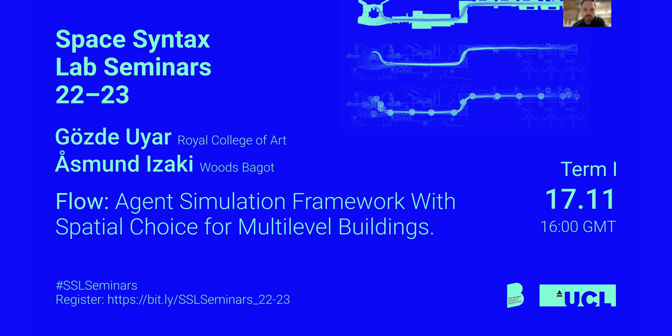Yes, so we decided to go with my part first because it sort of sets the stage, introduces the overall framework. So that's the direction, the order that we went with. We both worked on both papers, so it's a really fluid collaboration, I could say.

So just starting with the agenda. We will talk a little bit about who we are in terms of the companies that we have been working and are working in, developing these tools and these projects that you will see today. We will then introduce the framework and go through 2 case studies. The first one is a shopping mall in Europe, and then from there, Gözde will take it over, and she will show the airport terminal in North America, and also do the combined conclusions. And this will just be very briefly.

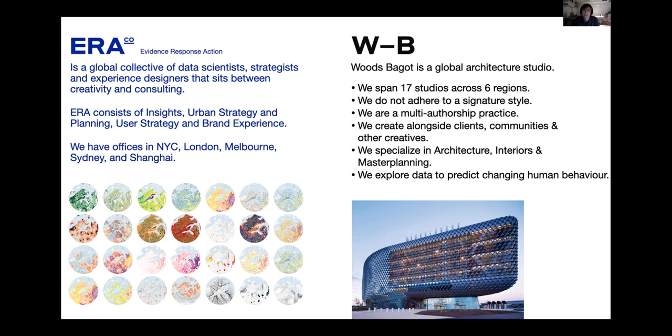So the work that we're showing today is done at ERA, which is a sort of global collective of a wide range of types of people, but it's working on a consultancy basis. And on the other hand, we have Woods Bagot, which is the global architecture studio.

Okay, so why do we work with agent simulation to start with? That's because we think it's a really good way to help develop buildings that operate effectively, to be able to test how they're used over time. We think agent simulation is a really good and unique tool for doing it. And it's not really our goal to just test the design and say that it's good enough or it works.

It's really in order to test design intention, so that if there's a discrepancy between how the architects think that a building should work and how our system gives a different result, that's maybe when something interesting is happening, because you have to say, okay, are some of our assumptions going into the model or the simulation wrong or not valid, or is it something about the way that the architects or their stakeholders have imagined this to work?

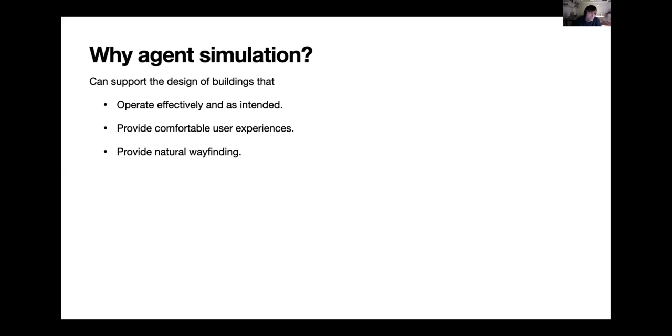And then what already exists in space syntax to do the agent modeling? So we have from 2001, as you all know, the space syntax-based agents by Penn and Turner. And these agents explore the space freely. You determine where they enter into the environment, and then they move around. And that works really well for weak program buildings and environments.

And then in 2012, we have the paper from Ferguson, Friedrich, and Karimi that introduced the origin destination weighted agents. In that case, you have both an origin and a destination, where you have the agents moving between. And this works really well for strong program buildings and environments, where you sort of naturally know where the agent's coming from, where they're going, and you can reason about it. And we actually use this method as it is for determining the movement paths for each of the agents, but it's integrated in our framework as one of the steps.

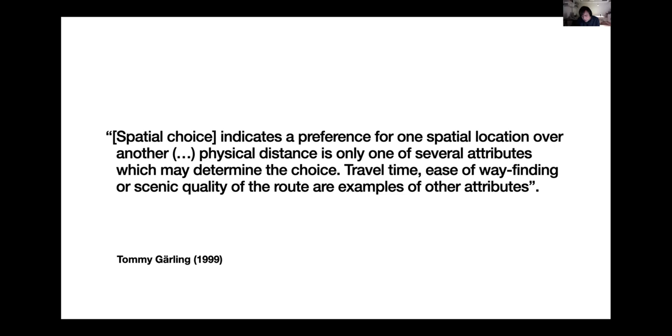So it's basically a way to define, if you have a choice between multiple spatial locations that offer the same program, let's say, what are the attributes that determine, how can you evaluate which ones are more attractive in a way? And that's really the principle for our framework in order to model the full choice of the agents.

So what does Flow really do then? So instead of basing it on the origin destination matrices, we simulate user journeys as an outcome, and it can incorporate schedules and timetables. It can incorporate a lot of different data sets. So far we've been working very specifically with the data sets that are available for each project.

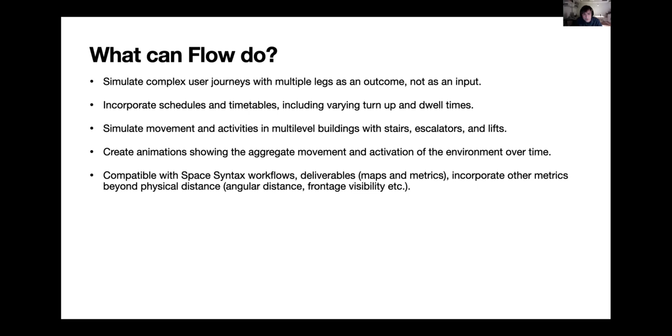While there are some new things, we also thought it was really important that it should be compatible with the space syntax workflows, the deliverables, because these are really useful, and there's a tradition and a knowledge around how we can interpret and use those outputs. And we were also very specific that we wanted to not only consider the metric distance, but take in as much as possible in the framework. And then for specific projects, we can use what is relevant in relation to the user type in that building.

This is just showing the overall simulation framework, which is based on different steps. And the next few slides are going to show each of those steps, quite briefly, but describe what they are. So it consists of constructing our own spatial representation of a building. We then generate the population for a specific scenario. We determine the itinerary for that population of agents, what they're in general doing.

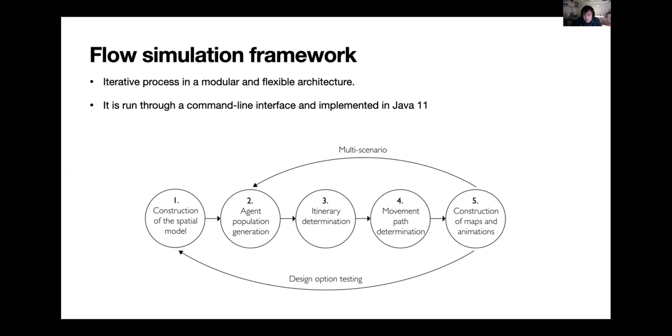Then we are using, as we mentioned, the origin destination weighted agent method for the movement paths. And finally, that produces a data set for the simulation that we then construct the maps and animations from. So the first part is basically constructing this representation of the building, which is a bit of a larger project for us, but we use it for all kinds of spatial analysis, but also for these simulations.

And we have developed a bespoke schema in order to represent the multi-level buildings in a topological way, where you have the walkable or circulation areas and how they're connected with escalators, and how secondary program is attached to this, in this case, shopping units with frontages and entrances. And we then have a code base to produce a lot of spatial analysis metrics on this model, which drives the agents, but they can also be used by themselves as spatial analysis outputs.

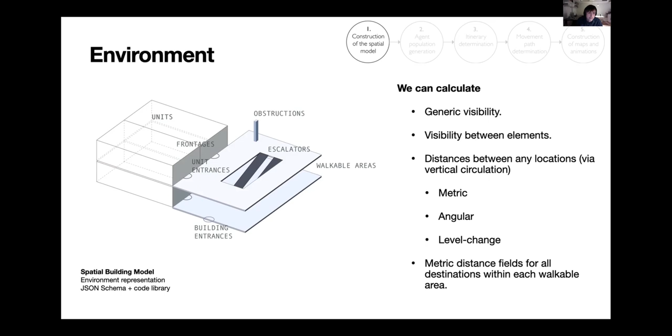Then we build population. How we represent the users is a bit different for different sectors, for different typologies. But the important thing is that the user has certain tasks or certain activities they want to do. They can have dwell times, they can have a specific order, and they can be mapped to a specific destination, or they can be a type of program that is available in several places. And basically any other attributes that affect their decision tree.

This is going a bit back to the spatial choice, which we use for determining the itineraries. So we have the agents, they want to do certain activities. And when they have the choice between multiple destinations, this is our sort of mathematical translation of the spatial choice definition by Gärling into mathematical formulas. But basically it allows you to give a score for each.

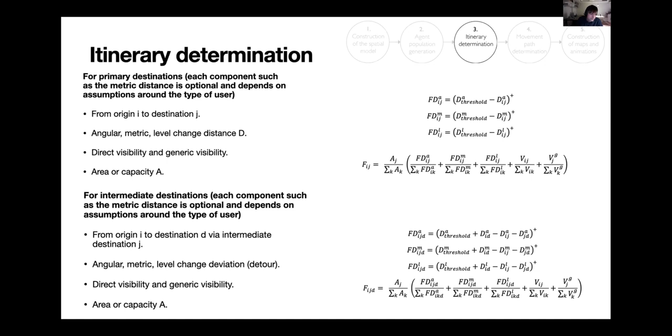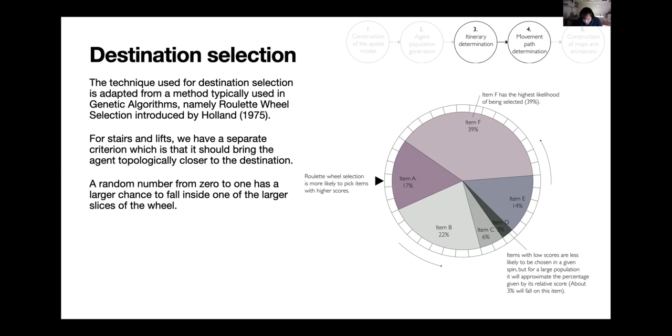And when we have evaluated each of the candidates, it's given a score, and then we borrow this method from Holland, which was originally used for genetic algorithms, where you need to pick not the very fittest, but high performers in the population. So it's kind of like a roulette wheel with different areas, so the candidates that have a high score have a larger area and a proportionally higher chance to be selected, which means that a destination that is performing less will be chosen fewer times, but it would still be chosen. Okay.

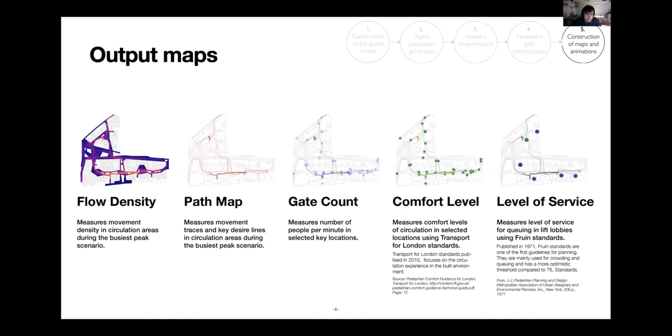And I will quickly just show the shopping mall project, which had 3 levels. On the ground level, you can also walk between all the buildings outdoors. And in what we're going to show now, the client asked us to consider a winter scenario, so it's less comfortable to walk outdoors. So in that case, we actually added one more criterion, which was the discomfort of moving outdoors. And you see there are these 3 buildings, 2 of them connected on the R+1 level, and the third one connected on the R+2 level.

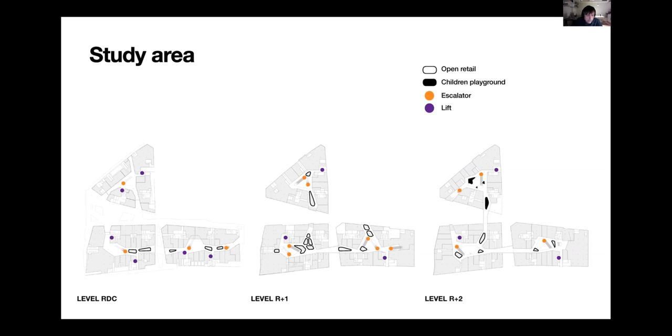And you can also see the escalators and lifts and some open retail and so on. There are usually some data sets, but there are also some assumptions that we have to agree with the client and some information that we receive from the client. So we receive, for example, the modal split, how many are coming by car. So they're coming from below, from the parking garage, and some are coming by bus and some by foot. And the scenario, the guys actually decided the scenario, which is 3 to 4.

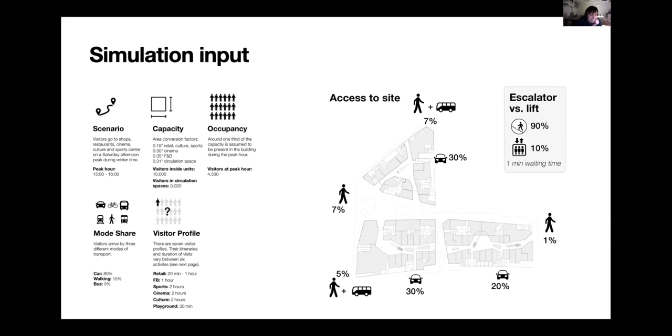This is just to emphasize that we are not always using all the different possible metrics that went into the formula that I showed before. In the shopping mall, we thought of the size of the shops determining the sort of capacity. We use both the metric and the angular distance and the visibility. So frontage visibility for the units, and just the general visibility for the escalators and so on. Plus, we added the outdoor, if it's accessible through an indoor path, that gave a higher score due to the climate situation.

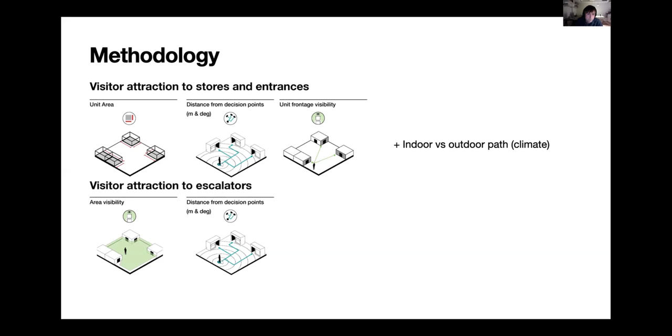These are the results. So we saw that there was a very high density between the lift and the escalators in one of the buildings. And this could cause some congestion there. On the other hand, we saw there were some open retail units that would benefit from the high movement footfall in one place, and in another place, we thought it would actually be a bit disruptive with the high density, as you can see in the middle.

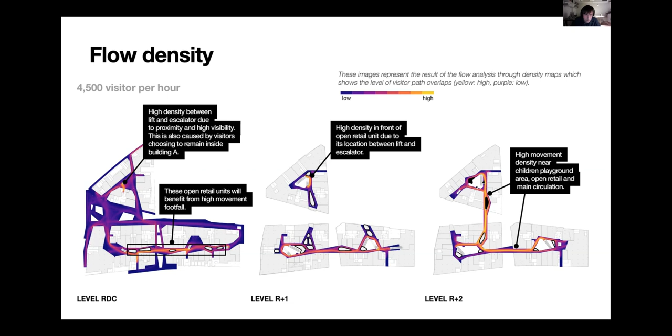One thing that we did realize when we worked with this was that the orientation of the escalators was really essential. Also because we're calculating the angular distances through the escalators across the floors. So actually turning the escalators can really change the angular distances when you move across the floors. Also the visibility, because we're looking at the visibility of the entrance of the escalators. So that we saw as almost like a tool to sculpt the movement.

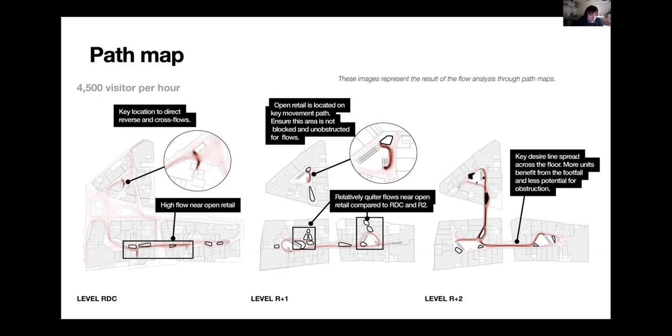This is showing just the gate counts. We can show the direction of the different gate counts. It's a bit of a question whether this was more useful for us than maybe to show to the client, because it was almost too much information for them.

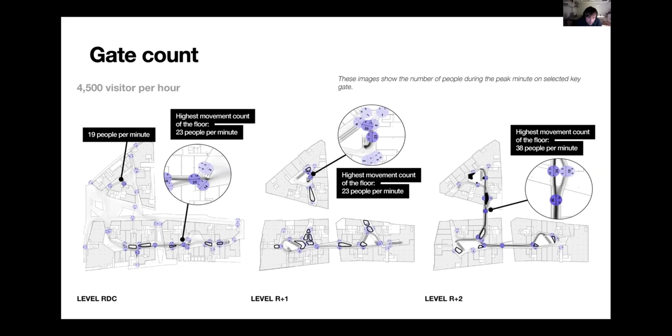And something like this was much easier for the client to really understand: where is it no problem, good comfort levels, where we might have some issues. So Gözde recommended to enlarge the width of one of the lift lobbies.

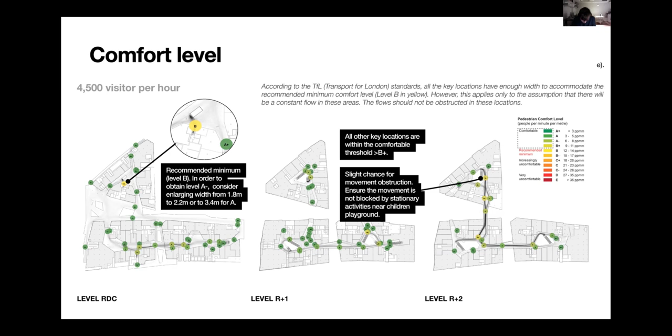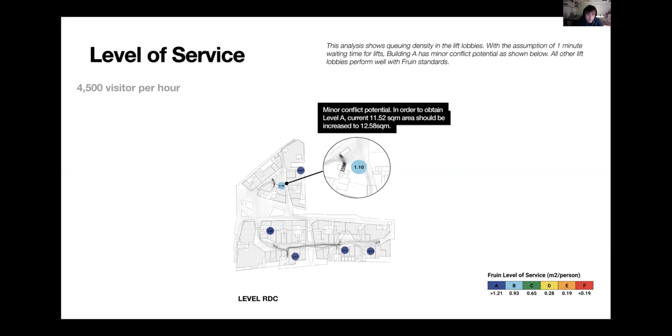Yeah, and this is basically talking about the same. So we saw it both with the throughput, which is showing how many people are moving per meter per minute, but also in terms of waiting, how many people have to wait in that lift lobby, both to sort of raise that location. So I think that sort of sums up my part, and then handing over to Gözde.

Great. So this is the second paper we presented earlier this year in Bergen. And so I worked on this paper with Åsmund and Freyan, I think she's also on the call, and Richard from Woods Bagot. And so after the shopping mall project that Åsmund presented, we were commissioned by LAWA, the Los Angeles World Airports, to look at the terminal building that they wanted to extend. And so adding on to that previous algorithm and the tool that Åsmund coded, sorry, go back.

We needed to add some more functions and some more parameters, because an airport building is much more strongly programmed than a shopping mall. So you have the constraint of the time. You have only a limited time in there until you go to your gate and take your plane. But also the movement behavior is very different. It's linear. So there are areas that are restricted. You can't go back after you pass a certain checkpoint. So it requires a bit different kind of thinking about simulating the movement in this building.

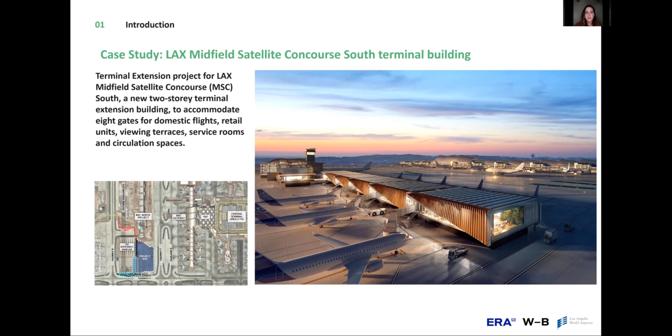So we were commissioned on that at ERA to run this flow model, but we did some other analysis on this building as well. We knew the envelope of the terminal extension, so we knew where the exterior walls were, but inside was empty. So we helped the Woods Bagot design team understand where the critical points would be for the retail units, in terms of visibility analysis and

some spatial analysis. But flow was very useful in the case where we wanted to look at specific passenger movement. The intent was to maximize their experience by increasing wayfinding and legibility of the gates, and also to identify any potential areas for congestion, and also the best locations for retail units. We also looked at the level of service at key locations.

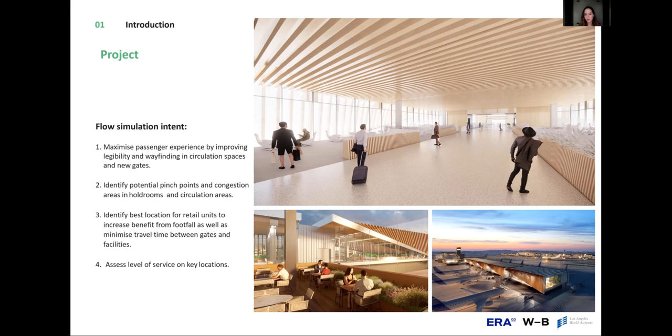So before going into methodology, I also want to say that we only looked at the part of the terminal after you go through security. So we didn't model anything like when you enter the building, go through luggage drop-off, maybe go to a shop there and then go to security. We only modeled after people pass through security, and then they face new shops or new areas for sitting

or eating. So here we had a bit more complex methodology compared to the shopping mall, where the movement is a bit more exploratory, but here it's a bit more coded. We have this in 3 categories. We created different passenger profiles, and each of them had a different itinerary, different turn-up times, different activities and the duration they spent on each activity. Not every passenger was departing from the gate, but some of them were landing, and some of them were just changing flights, changing gates within the same terminal.

So we had these 3 main categories of passenger, but we also had leisure and business, with separate sub-profiles inside them, which I will show in a minute. Then there's the attractiveness score that Åsmund mentioned, in terms of which units the passengers choose. If there are lots of beverage units, which one do you go to?

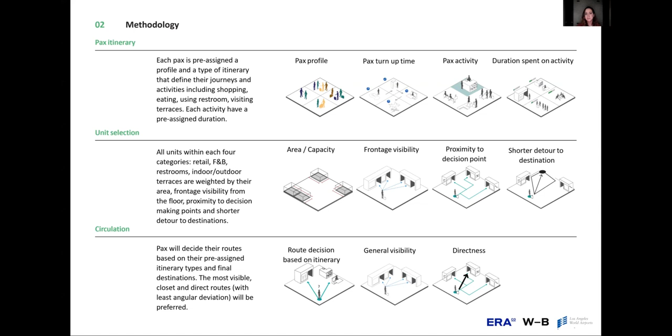So we used a lot of data as input, so it wasn't all assumptions. We had some data from the client, but we also looked at some survey results from the same airport a few years ago, and also a similar airport in San Francisco. With this data, we were able to make the initial assumptions and set the scenario, which time of the day and which hour we are simulating.

We always want to simulate the peak scenario. We know that if it works for the busiest time, then the movement will be okay for the rest of the day. So it's a domestic airport terminal with 8 gates. We know the aircraft size, so we could find how many passengers per plane, and we assume a 90% load factor. We found out in the survey that across the whole year, Fridays were usually the busiest, between 7 and 10 p.m. So we wanted to simulate these 3 hours.

We had also done some research about how long a passenger stays in the airport. It's usually up to 3 hours. And then we assigned different walking speeds to the passengers, so not everyone walks at the same speed.

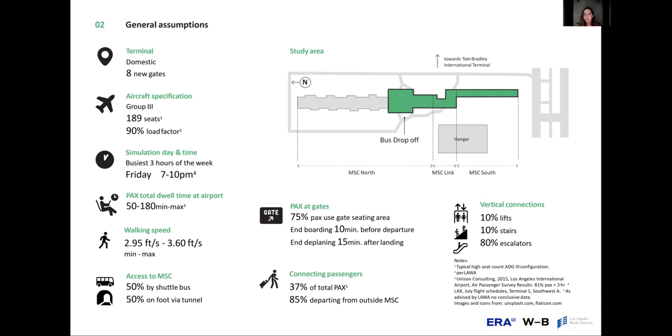So you can see the rest of the assumptions and data set we used here, with vertical connections and how they reached this terminal. So they had 2 access methods: one was by shuttle bus or by foot tunnel. So we assumed an equal distribution in that.

This is the study area. I'm not sure if you can see the whole screen. But yeah, so the passengers arrived to this terminal building, which was this floor where we studied. So they can use the escalators, lifts, or the stairs to come up here. And then they have the option to go to, this is after they pass security, so they have the option to go to restaurants in green and also shops.

And then toilets in orange and viewing terraces, some panoramic terraces they wanted to create for people to rest. So there were 3 in this floor. And the gate locations are here.

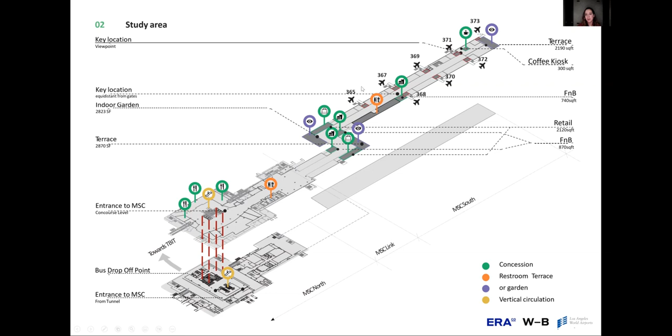So these are the profiles we created. So we used these percentages and numbers from the survey results done for LAX and San Francisco. We had 4 sub-profiles within each leisure and business passengers, and they had different distribution, but also different type of activity. So some of them went to shopping units twice, whereas the business went once.

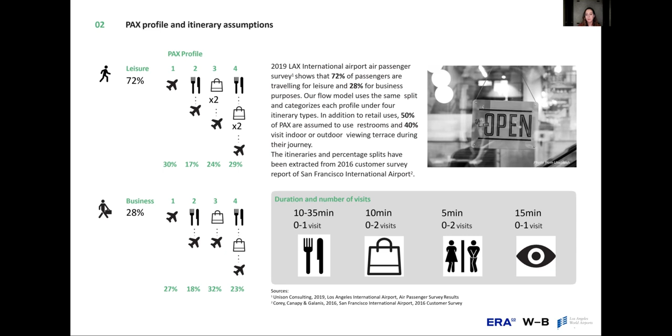And then they also spent a certain time within each, like 10 minutes in a shop, maybe for browsing, and then up to 35 minutes in a restaurant, 5 minutes in toilet. So we input this information before we run the simulation. So time was a very important factor, and we were able to simulate that, which is also the case for the flights. They all have a certain time they arrive to the airports, and then they depart.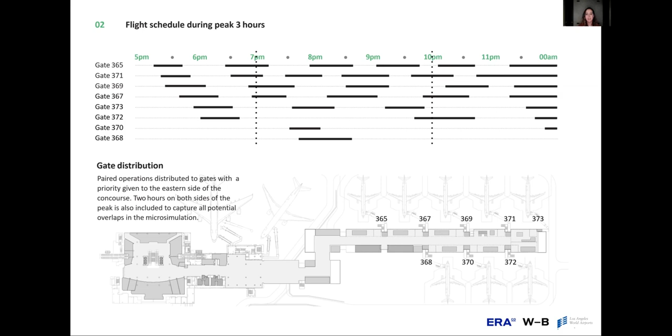So we calculated the numbers within 7 and 10 p.m., 3 hours, but we simulated 2 hours before and after our simulation period, so that once we start the simulation, we had the numbers already distributed with the logic, with the operation in control. Yeah, so this is showing how each passenger had a different itinerary. And then we ran the simulation. So around 9,000 passengers were simulated.

And this is a screenshot of the table that this tool created. So each passenger has an ID, and then there's a column whether they are connecting passengers or they arrived to the terminal by a plane, and then which flight they took, whether they are leisure or business passengers. They choose tunnel or bus to access here, and also whether they take escalators or stairs, whether they are female or male. It's quite detailed, and that was allowing us to identify which toilets they go to, for example. So we were able to simulate all that.

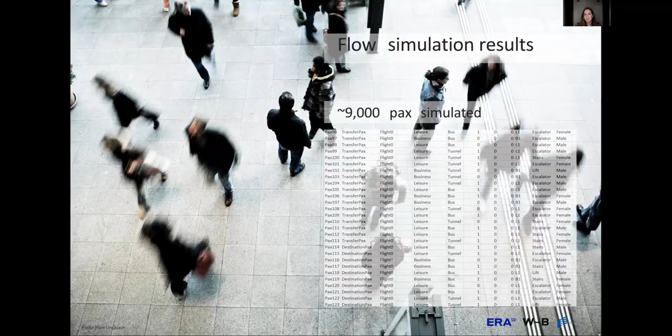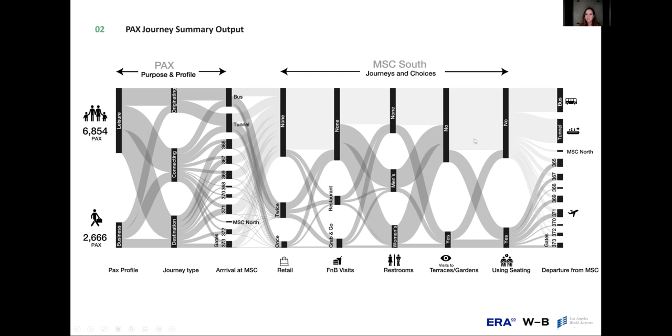And this is an output of the journey summary. So usually in space syntax, like the depthmap agents, the user puts in this matrix, so you know exactly how many people are expected in that destination. But with this framework, this is an output. So the algorithm and all these parameters that you set actually give you how many people are at the end in these destinations. So you can see the distribution of the passengers and their choices of places they go to, and then their gates, or if they are departing the terminal, which way they used to depart.

So, just to show you quickly the results, this is the flow density, which you have also seen in the shopping mall presentation. Here we can see the overlap of the flow and the key desire line.

And then you can see we had some issues in these corners that were highlighted as very high movement density because there wasn't visibility across. So this part of the terminal could be critical to replan. And we see that towards the end of the terminal, there is less movement overlap, which is an expected result because you don't have as many users. It's the dead end, basically.

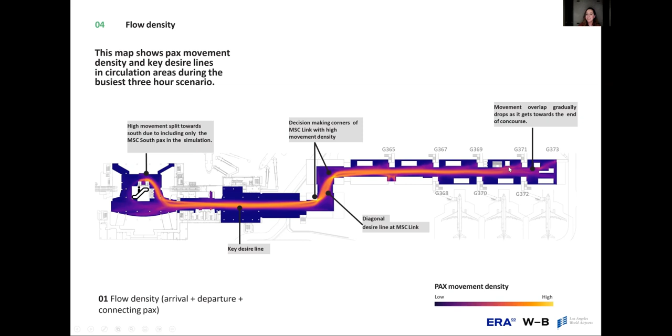With these paths, we could then isolate different passenger groups to observe their movement a bit separately. Because it's a bidirectional movement, people in red are leaving these gates to go towards the exit, whereas in blue, they are approaching this gate. So there's this bidirectional flow happening with maybe minimum visibility here, which could cause problems.

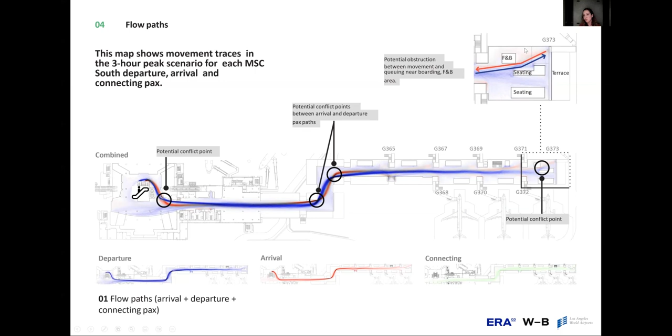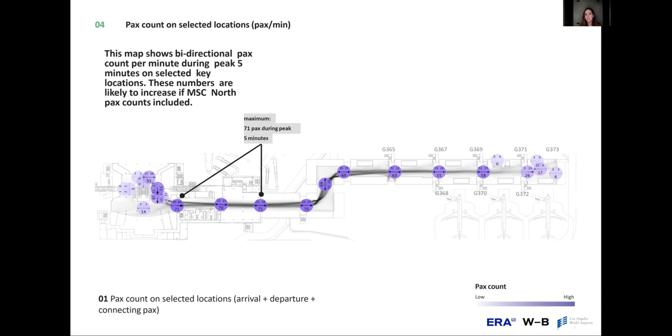We also zoomed into some areas to comment about furniture settings. And this was showing the peak 5 minutes on the flow numbers, like how many people are on these locations during the peak 5 minutes. And this was for us to then look at the level of service.

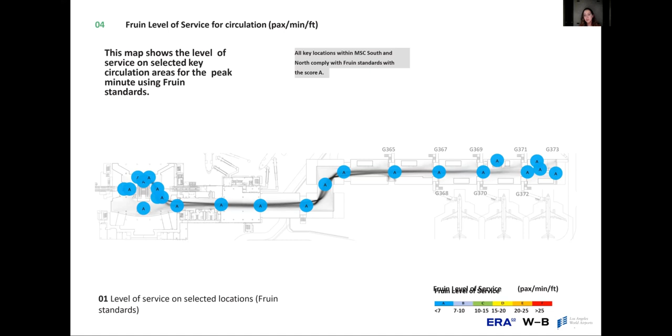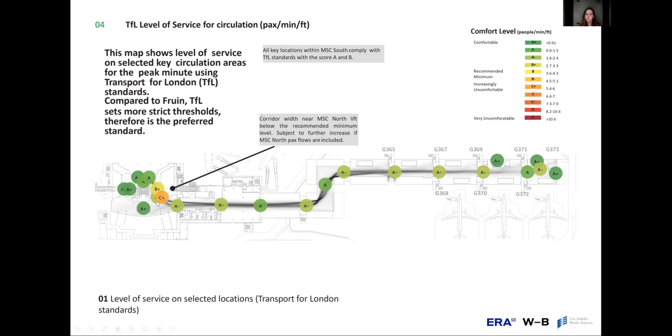So with the Fruin standards, all these locations were perfectly comfortable. We also wanted to challenge it, and we used Transport for London standards because these are a bit more restrictive. And so we identified one spot that might be a bit problematic, that was a bit more uncomfortable. We suggested to increase the width.

The other thing was the client was interested in the performance of retail and the restaurants, and they asked us if we could somehow give them an annual prediction or rank them. And so this was a kind of limitation for us. We couldn't do that because this simulation was only done for this peak 3 hours. It couldn't be extrapolated to the whole year. So that was maybe the limitation of the tool.

But what we did at the end was we grouped these units based on their functions. And then we looked at the average number in each destination, how many people visited them overall during the 3 hours. And we told whether it was below or above the average.

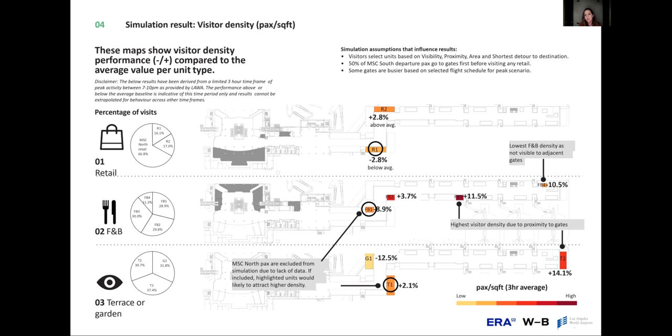One thing that was interesting here was that the viewing terrace, where people can go and look outside, at the end of the terminal where we see less movement, was actually the most used among the 2 other places. So that's an insight that we wouldn't be able to get with other kinds of metrics than flow.

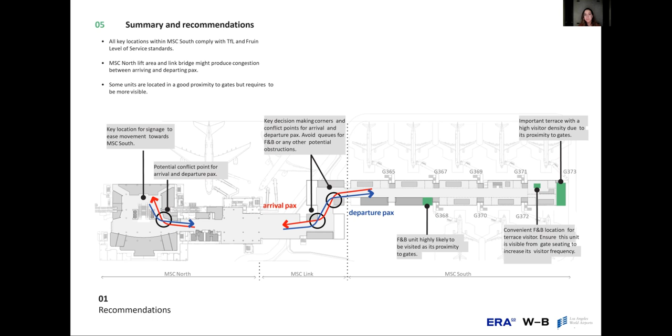So this is just a summary of what we delivered in terms of recommendations and identifying areas with problems in terms of movement. And just to end with the last 2 slides. Compared to space syntax agents, with this framework, we could simulate complex user journeys across levels. And that also gave us flexibility to account for timing and the duration of activities.

So initially it takes a bit longer to set up because it's a bespoke framework that was created for this project. But once we have it done properly, it can be replicated to other aviation projects, and it becomes very quick to run. And you can also repeat the scenarios and compare options in a very short time.

Compared to Legion and MassMotion, other pedestrian simulations, the framework doesn't account for waiting times for a destination. If a destination is full, there is no waiting time that we take into account. The crowding and queuing behavior is not captured, but that makes it quicker to run because it needs less computation time.